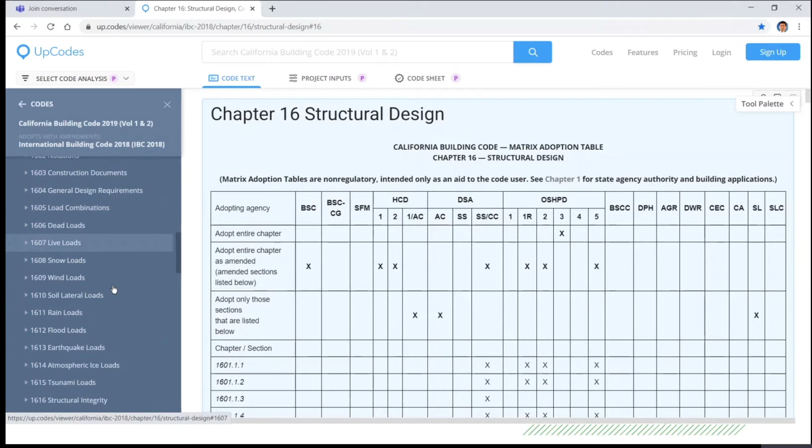So just for basic use, if you go to chapter 16, then you go to 1613, that's earthquake loads. So you can check everything related to seismic design. So it's very, very useful and it is free. So for the 2019 CBC, here are the tables in 1613.2.3. I went through the codes, and both tables are identical to those in the IBC 2018 and ASCE 7-16. You can follow my other videos to determine the seismic ground motion values.

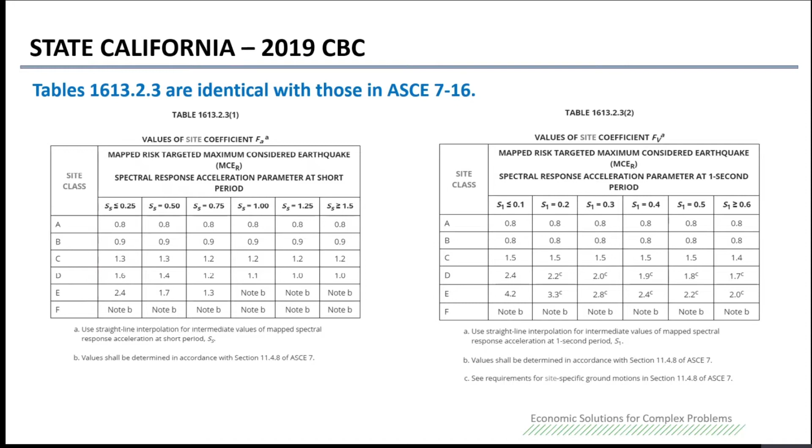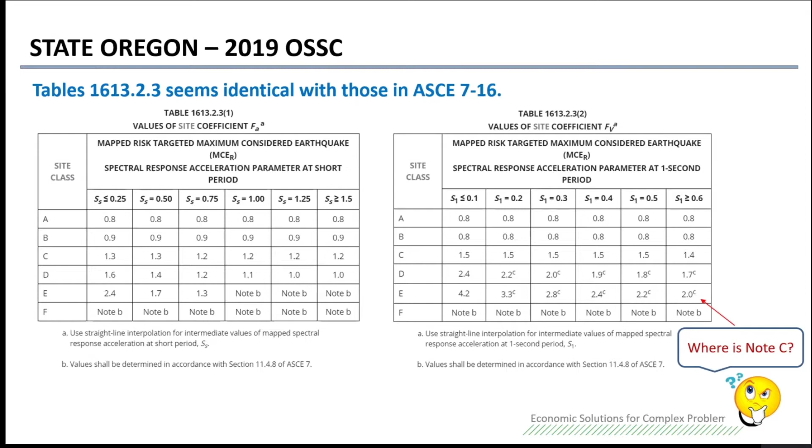So I just went through the code of 2019 OSSC, and I found this. I wonder if this could be note C. So in 1613.4.13, it provides an exception to section 21.3 of ASCE 7. So the right-hand side part is exactly identical to ASCE 7 section 21.3. However, they provide an exception.

So basically for site classes D and E, the values of Fv may be determined using straight-line interpolation between the value determined from ASCE 7 section 21.3, which is on the right-hand side. If you have site class D, the Fv value is 2.5 for S1 greater than 0.2, and the value determined from table 1613.2.3 in the building code, based on the relative hazard contribution from the Cascadia subduction zone. So what does this mean?

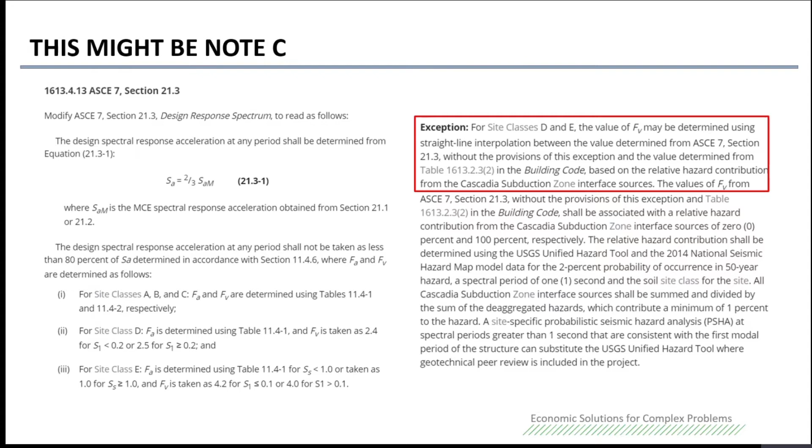So why do they have this change, this exception? So I did some research. I found this code amendment proposal application. I will provide a link in the comments area, so you can read it yourself.

So this proposal says the current ASCE 7 chapter 21 reflects the long-period seismic hazard, because in the Oregon area, particularly western Oregon, as you can see in the left-hand side picture, most of the seismic hazard is probably contributed by the Cascadia subduction zone. A subduction zone basically means you have two tectonic plates, and one plate tries to go underneath another one. This kind of subduction zone typically generates very large earthquakes. I'm talking about magnitude 8.5 to 9.

So the earthquake along the subduction zone typically causes the tsunami, like the earthquake that occurred along the Japan coast in 2011. So the rationale for this exemption: right now, the NGA-West2 GMPE, the ground motion prediction equations used to develop the seismic hazard, are based on crustal earthquakes. So like the San Andreas fault, that's the controlling fault for the seismic hazard in California. So that is not aligned with the subduction zone.

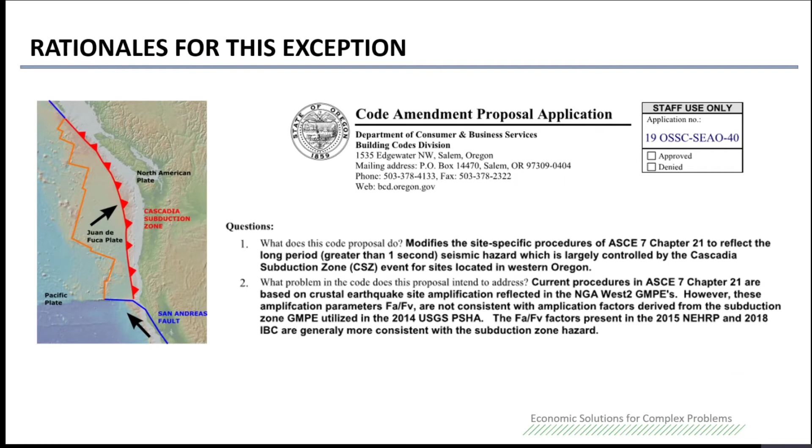So in order to make the hazard consistent with the subduction zone, they think the value without the 1.5 factor adjustment represents the reasonable hazard for the subduction zone. So that's why they have this proposal. It seems like the Oregon state building officials accepted this proposal, and they made the exception as I described in the previous slide.

So let's use one real example to show you how to use this exemption to reduce your seismic load and have some benefit. So I just randomly selected a site at Eugene, Oregon. That's the latitude and the longitude. Then I go to the USGS seismic hazard website and do the deaggregation analysis. You can check my previous videos if you don't know how to do the deaggregation analysis.

So this figure shows you the contribution regarding the distance to the source and the magnitude of the earthquake to the total hazard for this site. As you can see, for all the sources, earthquakes of magnitude 8.5 and greater are the contribution from the Cascadia subduction zone. So you add up this vertical axis, the percentage of each segment. This is not the entire subduction zone, it's just one segment of that fault. So you add them all together, that will be the total contribution from the Cascadia subduction zone.

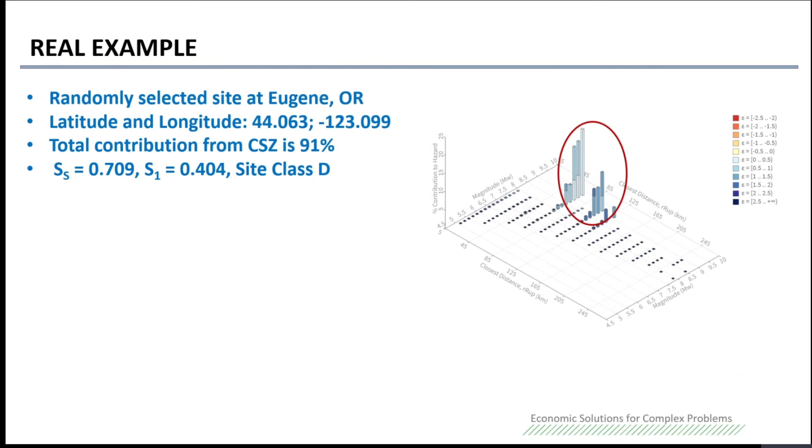So I did a calculation. Basically 91% of the seismic hazard is from the Cascadia subduction zone. For this site, you check the seismic hazard map, you get SS 0.709, S1 0.404. Just assume it's site class D. If you use the table value, the FV is 1.9. However, in section 21.3, the FV is 2.5.

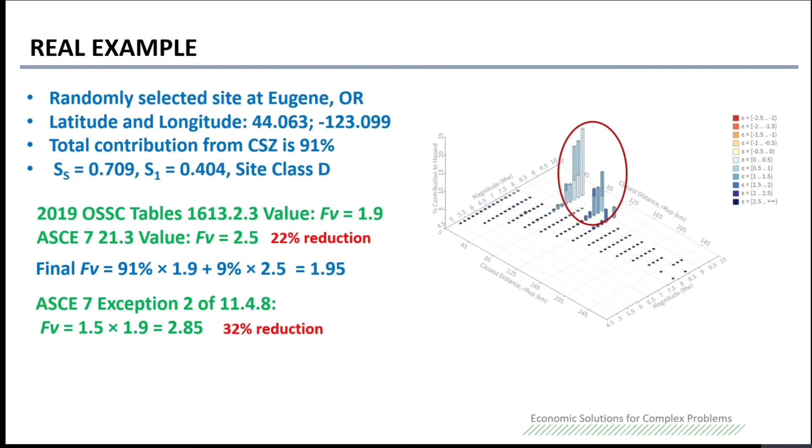So if you use the exemption, you use 91%, because 91% is from the subduction zone, times 1.9, and the other 9% is from other types of earthquakes, so you assume that value is 2.5. Using the equation, you get 1.95. Compared to 2.5, that's a significant reduction. Or if you don't do the site response analysis and use the exception of 11.4.8, you have to use a factor of 1.5 times 1.9, you get 2.85. That will make your plateau much wider compared to the FV of 1.95. So basically using this exemption from the code, you could reduce the FV value 22% up to 32%.

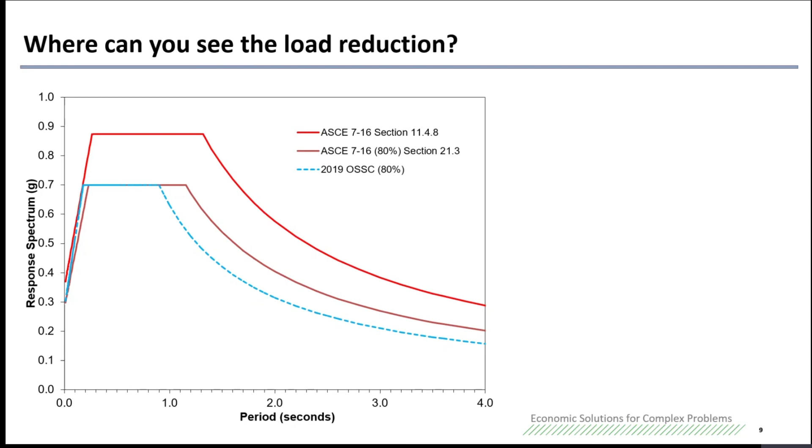So what does that mean? As I said, the FV value controls the width of the plateau. The red one is using exception 2 in section 11.4.8 of ASCE 7-16. That's the design spectrum for this project if you don't do the site response analysis. However, if you do the site response analysis per chapter 21, section 21.3, you can have a 20% reduction. This dark red uses FV of 2.5. This dashed blue line is based on using that exemption, considering the contribution of the subduction zone, further reducing the FV value. That will be the lower bound, 80%.

So what does that mean? If you do the site response analysis, because it's the lower bound value, there is a possibility you can reduce the seismic loading from this red to this blue dashed line. Just look at the period of 1.2 or 1.3 seconds: that's a 45% reduction. So basically, if you have a short period structure, that could be a 20% reduction, but for a high-rise building, 6, 7 floors or even taller, you could have much more than 20%, 40 or 45%. That's huge. That's a lot of savings for your project.

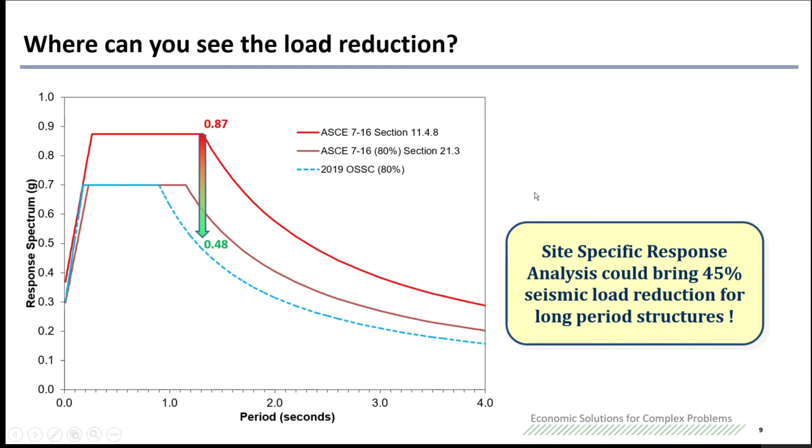Okay, that's all for today's class. I just found this interesting.